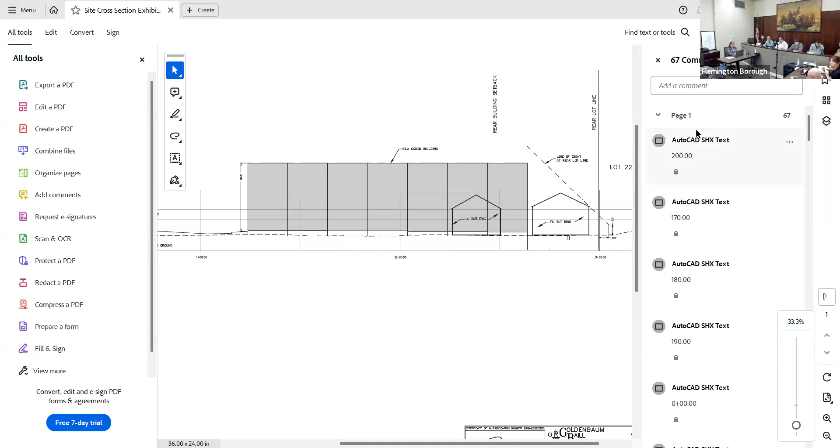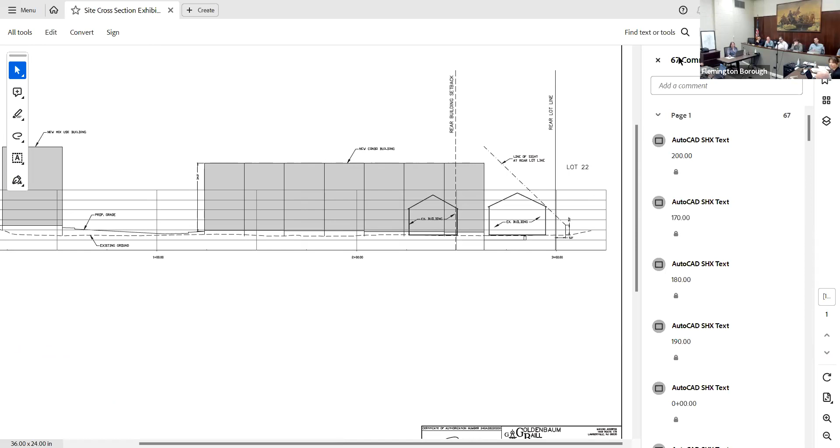That's okay, the way I have it set up on the big screen sharing, it's showing us for some reason. It's fine, it's a little small, you might want to zoom in, but I think you can roughly see it. If you close the two menus on the side, that'll help. Yeah, on the right side where it's the 67 comments, click that X. To the left. I can't get to it there. Oh my gosh. I need a 19-year-old to help me. That's as good as you're going to get it. I want to show the entirety of the dimension.

Okay, Mr. Rupnarain, why don't you identify this exhibit as a site cross section exhibit. I think we're up to A4. So this is a new exhibit - did you give us that, Tammy? The site cross section exhibit, exhibit A4. Can you please describe for the board what's depicted in this exhibit?

My office prepared this exhibit to show a cross section through the site, starting with Mine Street on the left-hand side of the screen and going toward the rear of the property through the two back buildings - the barn building, closest to the property line, and the garage, about 20 to 25 feet away toward the front of the property from the barn. The shaded gray area represents the two proposed buildings. The smaller shaded area toward the front or left-hand side of the screen is the mixed-use building we're proposing. This exhibit has been drawn to scale to show the actual height of the buildings relative to the existing and proposed grades on the property. The 7-unit condominium building is the longer, wider shaded gray area toward the right-hand side or middle of the screen.

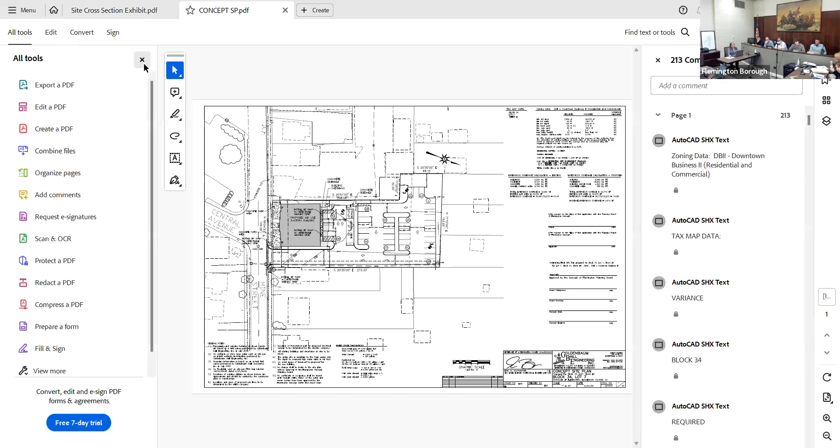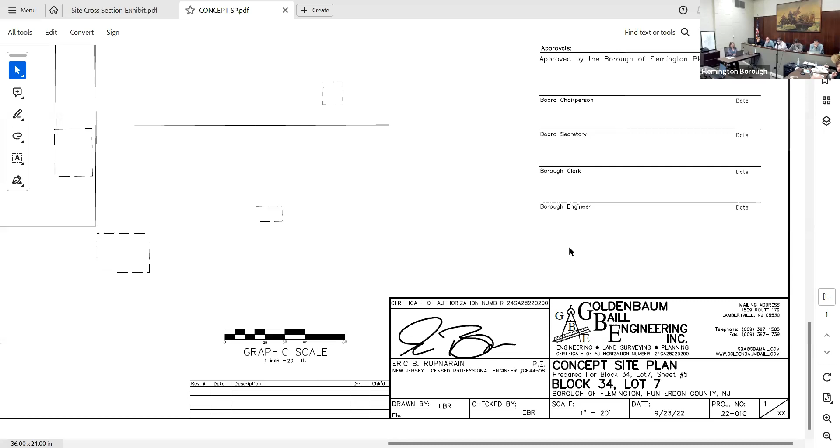That's it on the visual impact testimony. I'm going to have another exhibit here. You could identify this proposed plan as Exhibit A5. This plan is titled Concept Site Plan, prepared for Block 34, Lot 7, dated September 23rd, 2022. This concept plan reflects a proposed mixed-use 3-story building with the parking entirely in the rear, correct?

Correct. And is this a fully conforming concept plan to the Flemington Borough ordinance? Yes. And what type of mixed use does that provide for? So originally, when we started the project, the applicant was contemplating one large building towards the front of the property, in conformance with all of the building setback requirements for front, side, and rear.

And this building showed a mixed-use building with the ground floor entirely commercial space, and the upper 2 floors consisting of 8 two-bedroom apartments and 4 one-bedroom apartments, for a total of 12 residential units, plus the commercial space on the ground floor. The commercial space and residential units in totality require 38 parking spaces. This particular design and site layout provides 38 parking spaces. So this actually is a fully conforming plan that provides for 12 residential units. Correct.

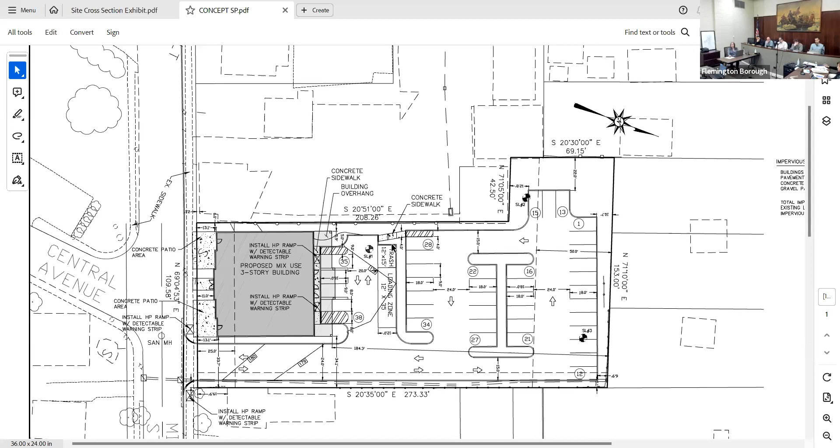But that's not what we're proposing, correct? Correct. The applicant is only proposing 11 residential units with their current proposal before the board. And in fact, if we apply the EV credits for parking, we might even be able to factor in additional units in this concept plan. Correct. With the EV credits, we'll create an additional 4 parking spaces on the property, which would allow the applicant to increase the residential units from 12 to 14. 12 to 14 or 12 to 16? 14. To 14. 2 more. Okay, sorry.

Anything else? That's it. Any other testimony? No, unless the board has any questions. I have no other questions. Okay, so questions from our board's professionals on the testimony around these 2 exhibits. Back to the visual. It's up already. Thanks.

The building at the rear that you're showing, that building is not going to be there anymore, right? Correct. That building's gonna be gone. Yes.

Explain again what you're trying to show with this exhibit. So the building's not going to be there. You're going to see the end of this building. You can see the end of the proposed building that's within the setback here. Yes. All right, maybe I missed, I didn't catch what the purpose of this was. What we were trying to show is if you're standing at the rear of the property and looking towards Mine Street, essentially what you would be looking at based on what exists right now. So for you to see anything beyond the building directly in front of you, you'd have to stand and pretty much look at an angle up into the sky.

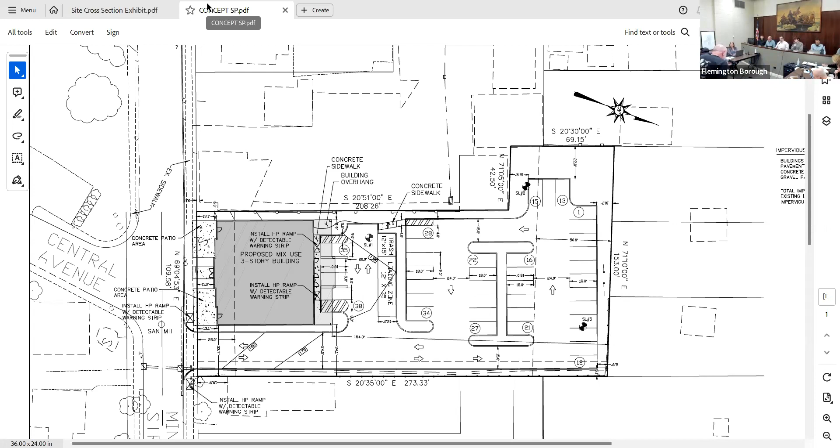Can we go back to the visual and zoom in on the part at the back and maybe move that over to the left? Because I think the key part of what you're trying to show is getting kind of lost on the screen. So I just wanted to see that a little bit before I actually ask the question. It was a little hard. So this is the.

Currently, from the back of our property, we see a blank face of a barn.

To echo what was said earlier, will there be a rendering to show what the actual building would look like from that perspective? Yes. Okay, other questions from members of the public?

Nancy Connolly, 22-1 Canal Street. Is there any renderings that can be produced that will show the height variance of what you're doing now versus what is there?

That will show what it will look like from Canal Street, from the backyards of Canal Street. We're going to have an architectural plan to show you what the building looks like from there, the height difference. I'm talking engineer. So that hasn't been taken into consideration - we don't have a section all the way through from Mine to Bonnell.

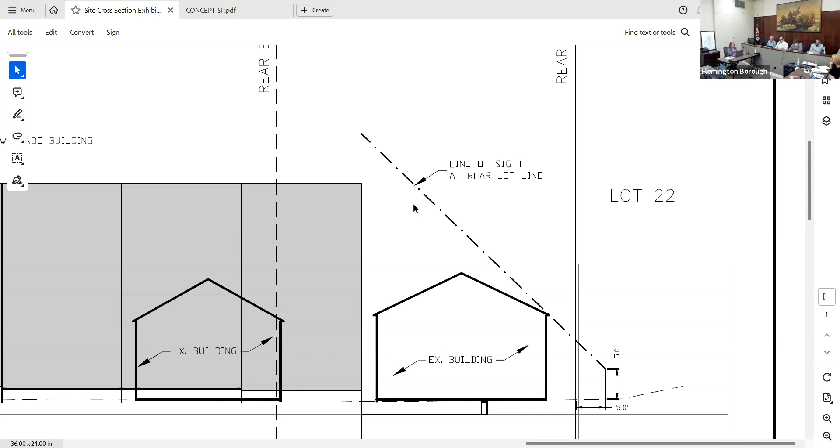All right, call Mr. Kyle. I honestly don't remember, did we swear everybody in? I was looking at that right now. Okay, I thought we did. He was here last time. Yeah.

I offer Mr. Kyle as an expert in the field of architecture. Any questions from our professionals or objections? I just can't help myself - I just want to make clear that Mr. Kyle is not related to my partner. Okay, that's fair, we want any appearances of conflicts put out there, that's fair. Any other questions from members of the board? Okay, without objection.

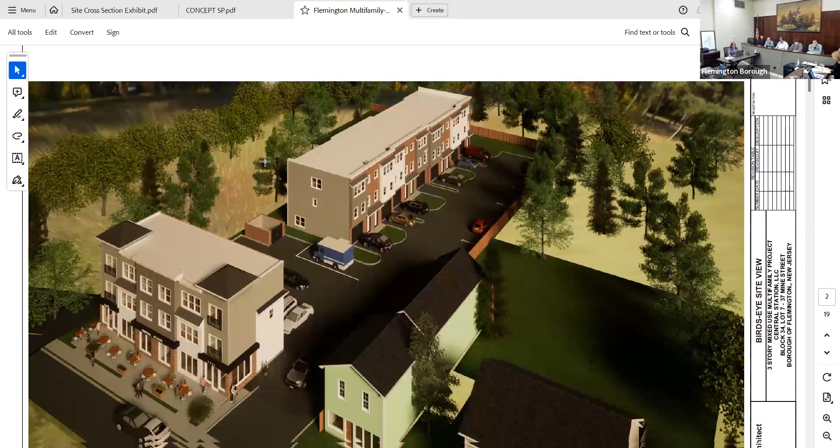Today's thing, okay. What day? So October 3rd, 2023.

Why don't you take the board through your presentation on the architecture? We want to resolve this. Okay, all right. What's the overall development description?

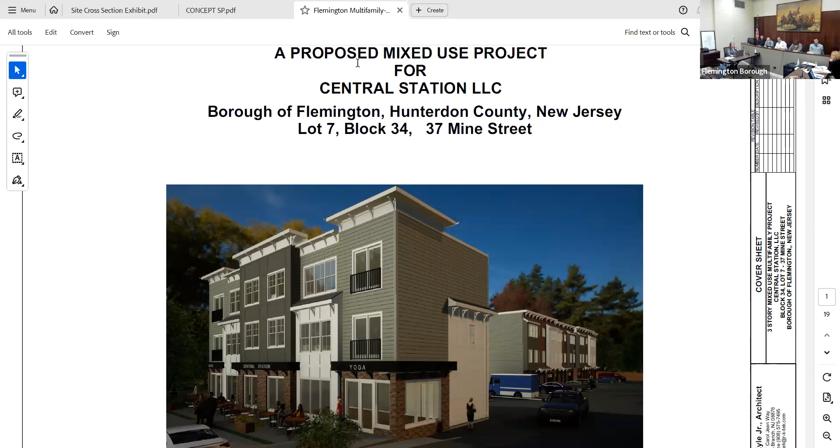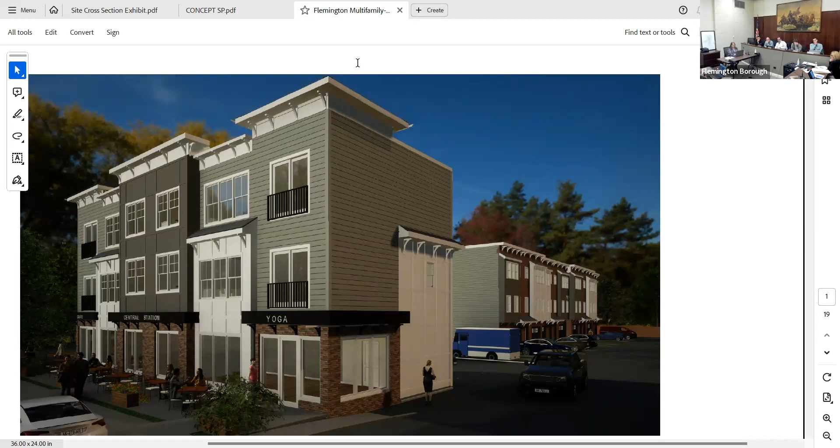With downtown shops, a brewery, and local restaurants and cafes in the area, Flemington has many elements that can make it a magnet community for a younger population, attractive residences, and additional commercial uses that meet the needs of that population and existing residents, critical to continuing the revitalization going on in the area. Our vision is to transform the vacant, underutilized, and deteriorated site into a mixed-use multifamily project that both complements and elevates its surroundings, and reinforces the connection between the downtown area and the Stangl revitalization area that's going on now.

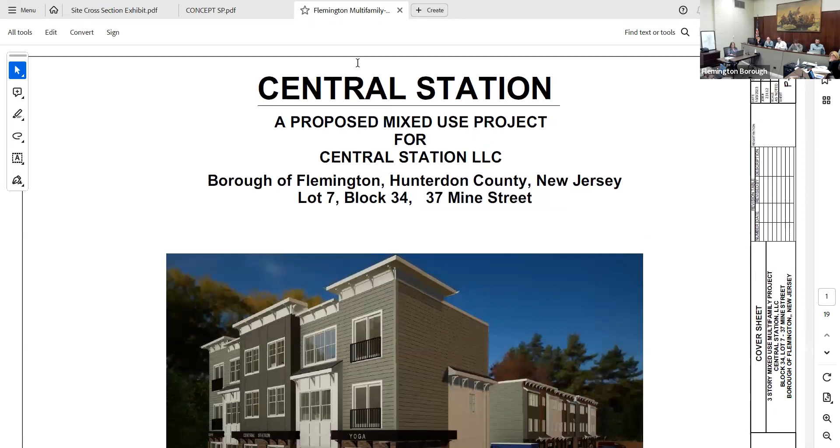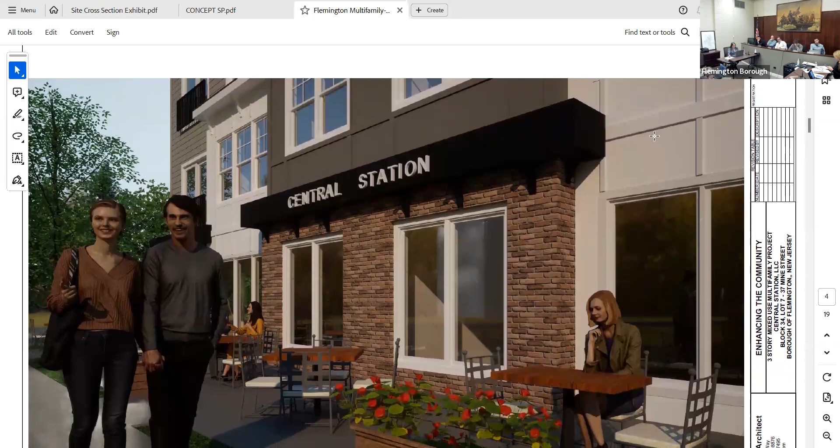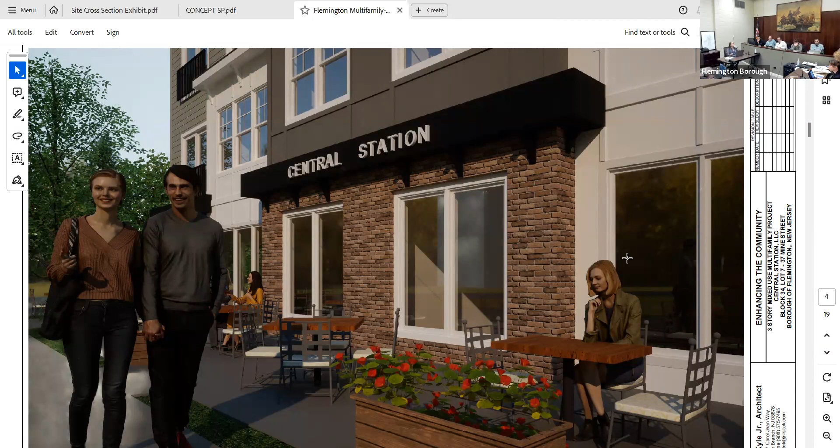It starts with a refreshed Main Street streetscape that combines welcome familiarity with a fresh outlook. The building facade blends today's design trends with familiar and traditional materials such as brick and smooth clapboard and board and batten siding. Traditional architectural elements such as trim cornices, double hung windows, and brackets are used to blend this with the surrounding historic architecture.

Next, I'd like to give a brief description of each building. The first one is the building along Mine Street - that's a mixed-use building. The building facing Mine Street is a three-story walk-up mixed-use building. The first floor is comprised of 2 commercial spaces, and the second and third floors each have 2 residential units per floor - one 1-bedroom unit and one 2-bedroom unit on each floor, for a total of 4 residential units in the building. All residential units have open floor plans.

The building footprint is 2,024 square feet on the first and second floor, and the third floor gross area is 2,000 square feet. The width of the building is 69 feet 11 inches, and the depth at its deepest point is 30 feet 2 inches, at the center point of the building going front to back. The maximum building height is approximately 39 feet 1 inch at the topmost roof peak, where there are hip roofs at the 2 corners. That is less than the 40-foot maximum height allowed by the zoning ordinance.

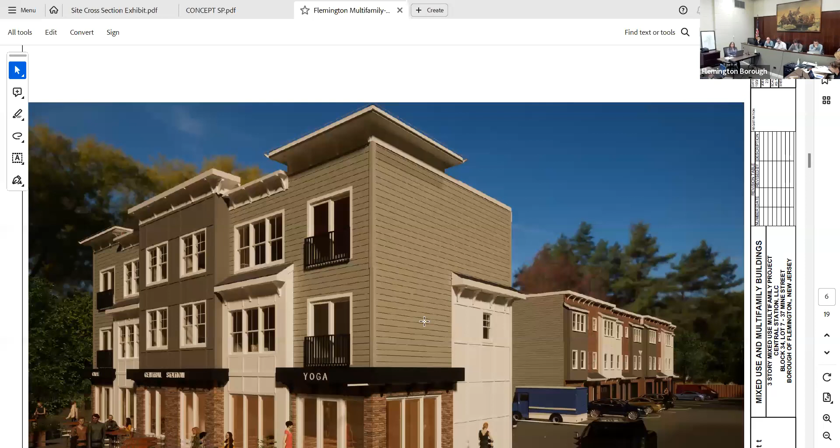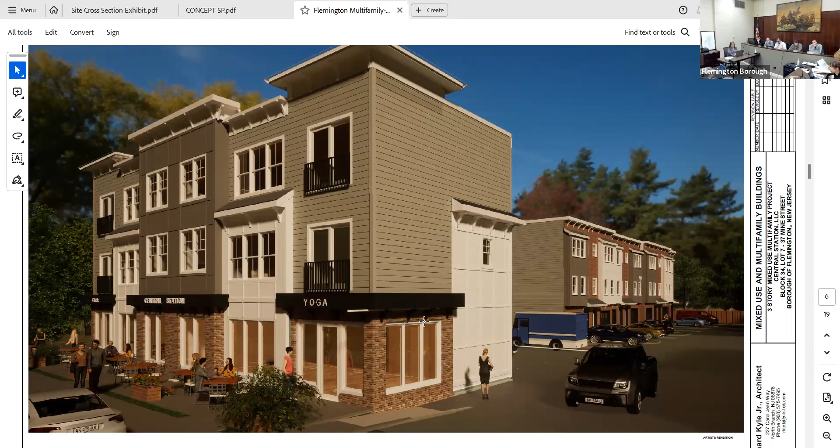Moving on to the multifamily building towards the rear of the property. The multifamily building behind the mixed use building incorporates 7 townhouse style units with 2 stories above the garage and entrance, so it's a 3-story building. The footprint of the building in total is 5,600 square feet.

The width of the building is 140 feet, going from front to back on the site plan, and the depth of the building is 38 feet 8 inches. The first floor is comprised of the unit entrance, a 1-car garage, a multi-purpose room, a laundry room, and a utility area.

The main floor level has the living level, which includes the living area, the dining area, the kitchen, powder room, and a closet. The upper floor has 3 bedrooms with closets, and there's 2 bathrooms. All residential units have open floor plans in this building as well on the main floor.

My proposal originally submitted to the town had an optional 2-bedroom design. That has been removed, so the optional 2-bedroom design included in the proposal has been removed. All units will be 3-bedroom units.

The maximum rear building height is approximately 34 foot 1 from the finished grade to the cornice top, which is less than the 40-foot maximum allowed by the zoning ordinance. The building wall height facing the rear property will be 36 feet from the current grade, similar to conversations with the engineer at the last meeting. There's a 2-foot, approximately 2-foot grade change at the back of the property, so accounting for the 34-foot 1, you would be at 36 feet from what would be the current grade.

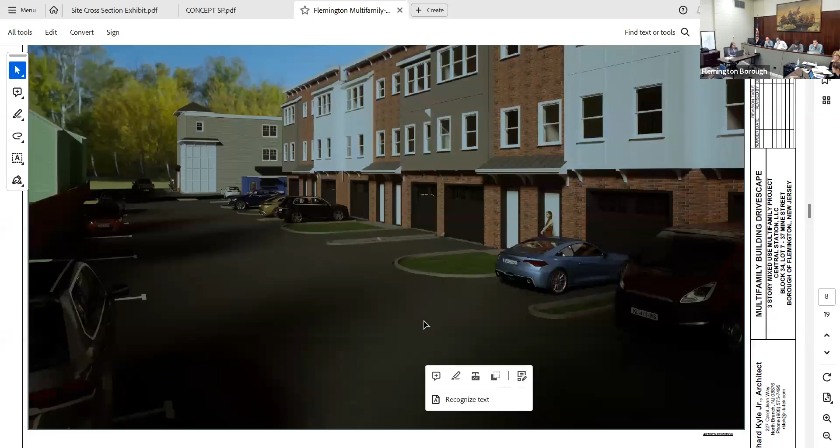Let's talk about the mixed use building in a little more detail. The front building's first floor is comprised of 2 commercial spaces along Main Street, and the entrance and stairwell for the upper floor residential uses is in the rear of the first floor. Commercial uses shown on the plans are examples only. All uses allowed under the zoning ordinance are potential uses for the commercial space. The commercial spaces and second floor residential units will be ADA accessible according to New Jersey's code.

Commercial space number 1 on the left side of the building has a 900 square foot gross floor area. Commercial space number 2 on the right side has a gross square footage of 732 square feet. Ceiling height of the ground floor will be 10 feet.

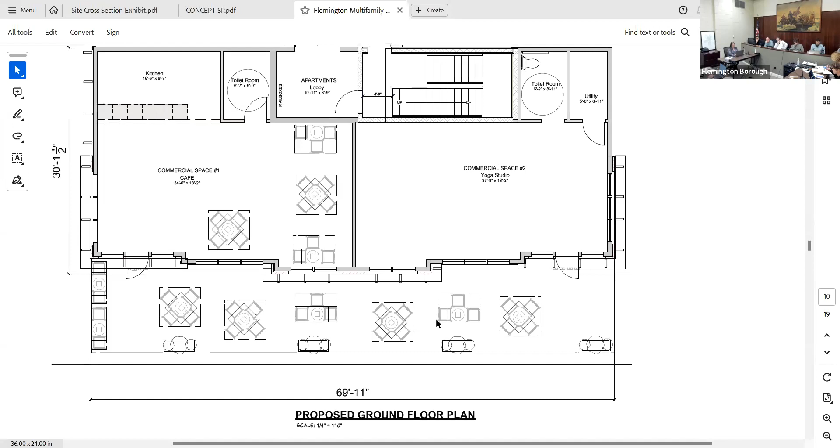The residential units, there's 2 per floor, and there's 2 floors. So you have one bedroom unit at 756 square feet and 1 2-bedroom unit at 950 square feet on the second floor with a ceiling height of 9 foot. On the third floor, you have one bedroom unit at 769 square feet and 1 2-bedroom unit at 940 square feet.

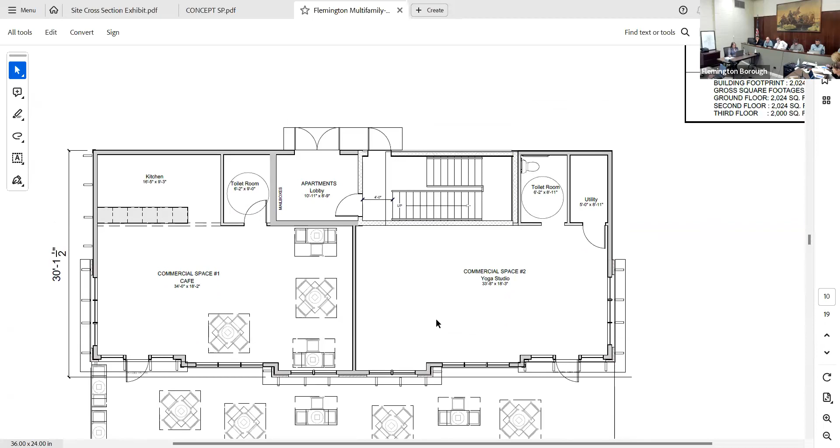On the third floor with a ceiling height of 9 foot. The slight changes in square footage have to do with the way some of the bump outs work in the front of the building.

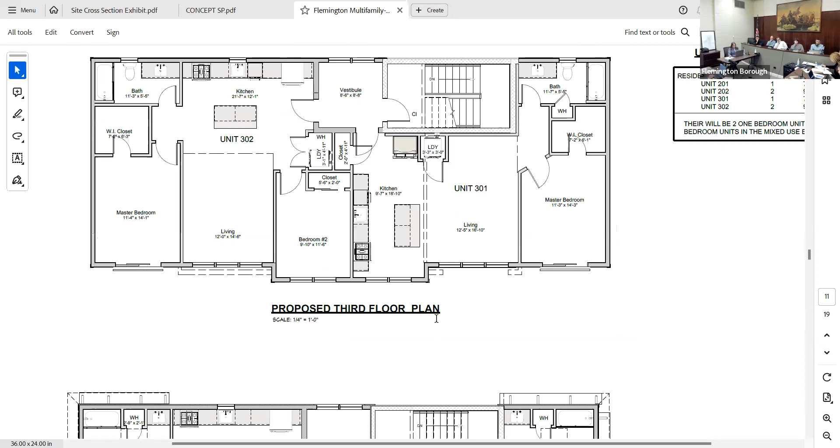1-bedroom units will each have a main open plan, the dining and kitchen space all open. It'll have 1 bedroom with a walk-in closet and 1 bathroom. There will also be a coat closet as well as in-unit laundry space.

The 2-bedroom units will have an open floor plan as well with the living, dining, and kitchen. 2 bedrooms, with 1 having a walk-in closet, 1 with a standard closet, and 1 bathroom. There will also be a coat closet as well as the in-unit laundry space. There will also be space for the HVAC units.

All residential units will have luxury vinyl tile floors. The primary bedrooms will have a sliding glass door facing Main Street with black aluminum guardrails on the outside. An external mailbox package box for the commercial units and the 4 residential units will be placed on the 6-foot wide rear sidewalk to the right of the rear lobby door.

So maybe we can go back to the first floor. Next one, please.

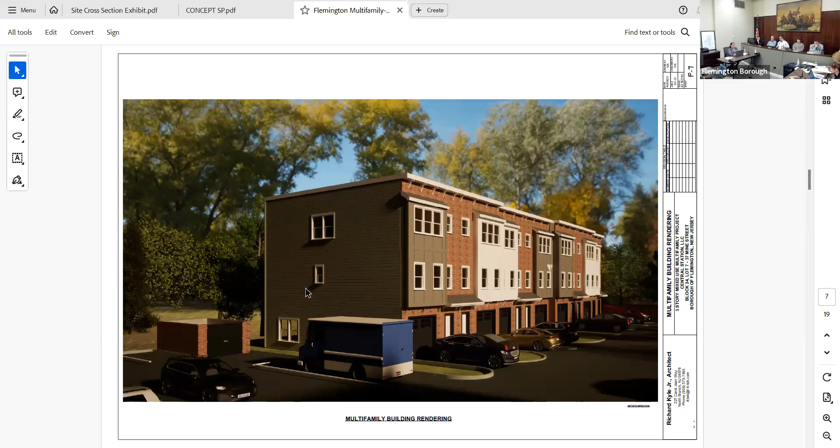As far as the materials to be used on the project, we've used a mixture of materials. We have clapboard and corner boards — we're looking to use fiber cement, smooth clapboard siding with a 6-inch exposure. In the drawings submitted, they're painted a HardiePlank pearl gray color. Also, on the front of the building, there's board and batten siding, something like an Azek or similar, and that would be white. In some instances, it could also be an age-treated color by HardiePlank, depending on the rendering.

The brick would be a running bond. The color hasn't been determined yet, but it would be something similar to what's in the rendering. There would be detail, not necessarily shown on these drawings, around the window and door openings to add a little more interest, and we'd look to maybe some of the historic stuff.

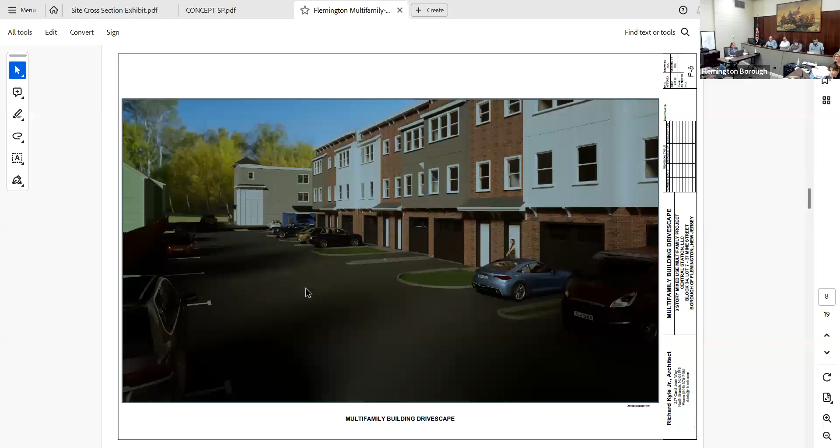Talking about mailboxes, I'm going to show this here. This is also going to have an external mailbox and package box for the 7 residential units, and that'll be placed at the edge of the grassy area adjacent to the loading zone. If you're looking at this picture, it would be to the right of that box truck, between that and that car. So that's where the mailboxes will be located in that area, and it'll be facing the drive area.

Exterior, the HVAC again will be on the center part of the roof, so it's not visible from the public. And if required, for some reason, screening would be installed if it's necessary.

On the rear part of each of the units, there will be a concrete patio that is 10 foot wide and 6 foot deep going towards the side property line. That'll be shown in an updated plan, it's not shown in the drawings you have. That'll be outside each of the rear sliding doors, which is shown on the plan. There will be a 6 foot high and 6 foot long screening fence placed between the adjacent patios for privacy.

A table and 4 chairs and a barbecue grill are what are anticipated on the patio. The lower level will be reconfigured in an updated plan to allow the main floor and the lower floor patio doors to align over each other, where they currently do not.

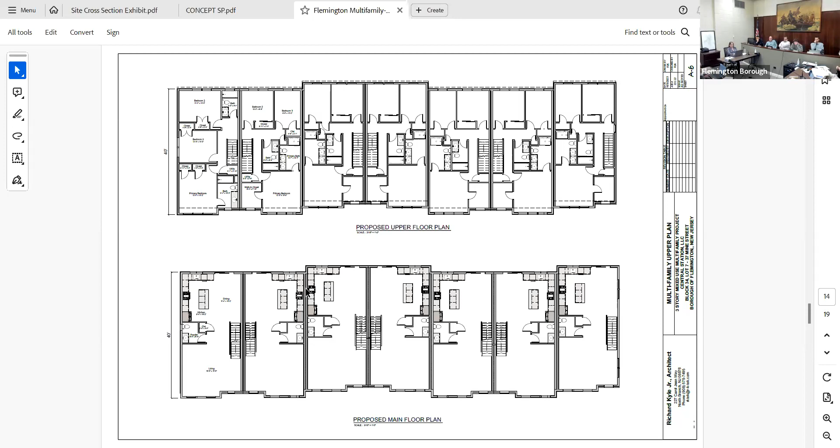Exterior lighting here, there would be a sconce light located at the front door, at the rear doors, and a recessed light in the little roof area that is over the garage door.

Materials used here are the same materials and colors that we have on the front building, to keep continuity between the entire site. I can go through them if you want, but basically it's the same materials and colors. There's no signage that would be here other than house numbers, so I don't see that as being anything there.

One of the questions that came up had to do with the historic nature of where we are. We are in a historic district, so we have something for that. The site is located within the Flemington Historic District, and according to the memorandum on August 24th, 2023, the buildings on the site are classified as either encroaching or non-contributing to the character of the Flemington Historic District.

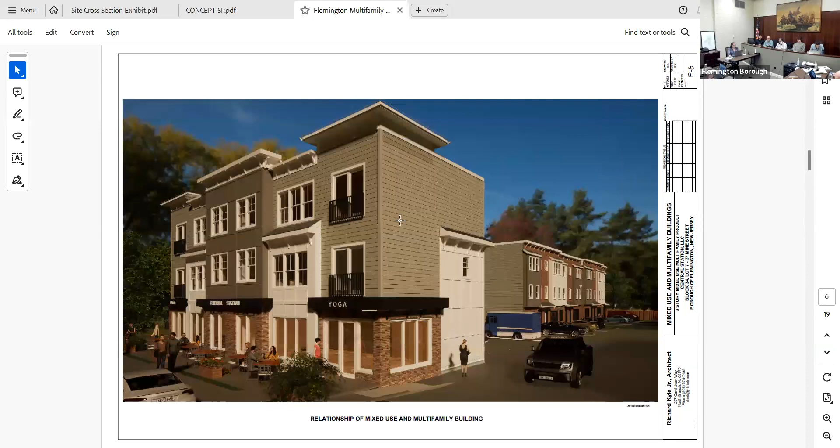Okay, great, look at this. Basically, we would be putting them in the center of the roof, so it's farthest away from any point. Those would be condensing units in the front building, slated to be a heat pump system. So there would be 6 units that would be there, and they're not huge.

And they needed to be screened. I testified that we would add screening around it, but I'm not sure with the height of the building that you'd have to be pretty far away to see that. It's the same thing with the back building as well. Those would be more traditional HVAC units, and those units would go on the roof as well, and again, if needed.

They would be. And how do you get roof access? In the front building, there would be a ladder system in the stairwell that would go up to the roof. For the back building, I would think that would be accessed through a ladder outside of the building.

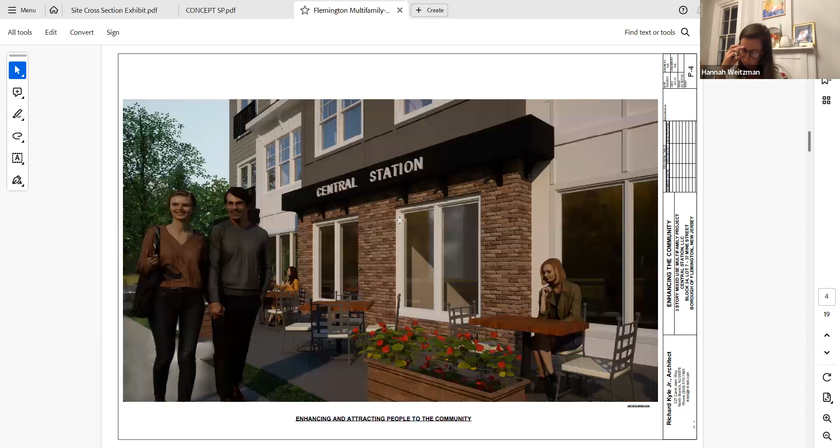Okay, thank you. And then I had one other question, just for the front building, since the windows are all visible on the main street and everything, is there any kind of proposed, or would you be willing to provide consistent window shades for the windows there, just curtains for the apartments or the condos?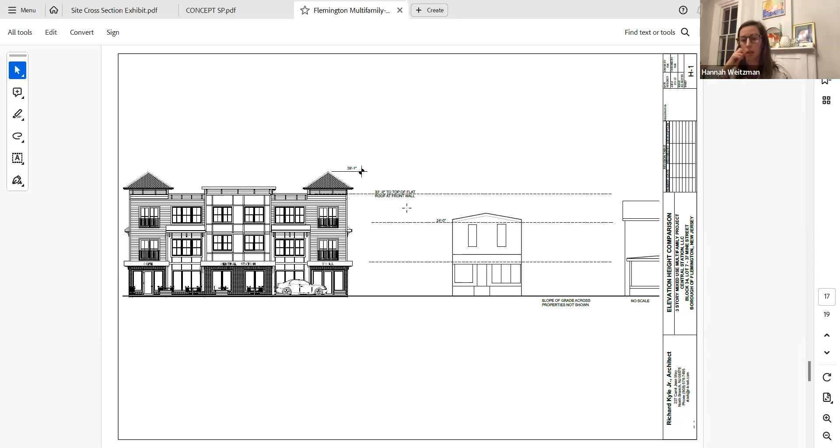I don't know that we were getting to that level of detail. I wasn't sure if that was something you considered or not. That might be a little bit difficult for us to control, quite honestly, because condo owners could put up their own curtains or shades in their windows.

Okay, I think that's it from me. Thank you.

I just want to clarify for my notes. I think Dennis had asked a question about whether there was going to be parking in the front, and I'm not sure if we got an answer. The architect didn't provide testimony on that, but I can answer it: there are 2 on-street parking spaces existing along the frontage of this property, so there can be parked cars in front of the building. That's the existing condition.

Thanks, could you stop sharing again, just so I can see who's speaking? Makes it a little bit easier. Jim, do you have any questions?

The only question I had, I didn't hear any discussion about the height of the buildings to the left of the structure as proposed. If I remember correctly, they're all pretty much at most 2-story, but mostly single-story, even the commercial ones. This is going to be the last big building on the block, apparently, and it will be the tallest compared to what is at Main Street and coming back. But what's the next building to the left, one story or two? I think they're one-story. There might be some two-story toward the back, but I think it's a one-story building.

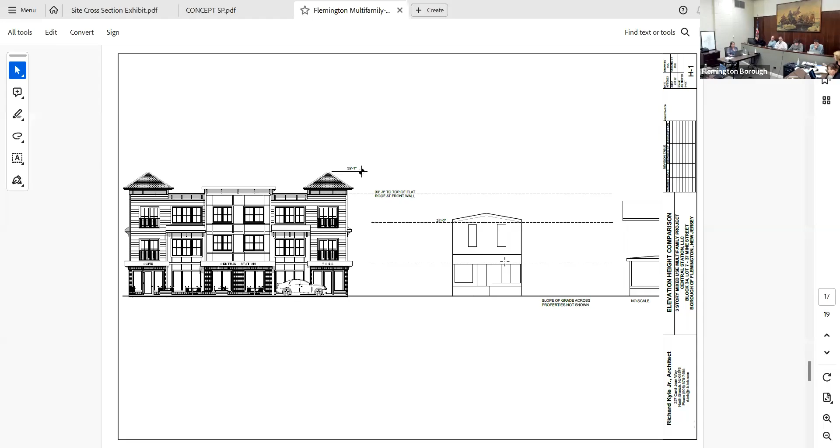Go to the one, if you just look at the overtop view. So the front of the building, the grade goes 0.9 feet up, right? Well, we're talking about the back building for that house, not the front building.

So the high point is towards the center of the site, and then in the back of the building it steps down. Directly along, you get something of a step in each place. There's no basement in any of it, so the slab is going to be on whatever the existing grade is. In the case of the unit closer to the center, that unit might have a ceiling height of 9 feet, and it would get progressively taller toward the back, where it would be 10 feet.

So the floor of the middle of the ground floor is going to match what's going on on either side of the building. We have to see the final engineering changes they were discussing, and work it out so that the goal would be to make the grade the same on both sides, if possible. If it couldn't happen, we would add a step to the back, coming out of the back door to the rear patio. The front door, though, would have no steps - that would be straight.

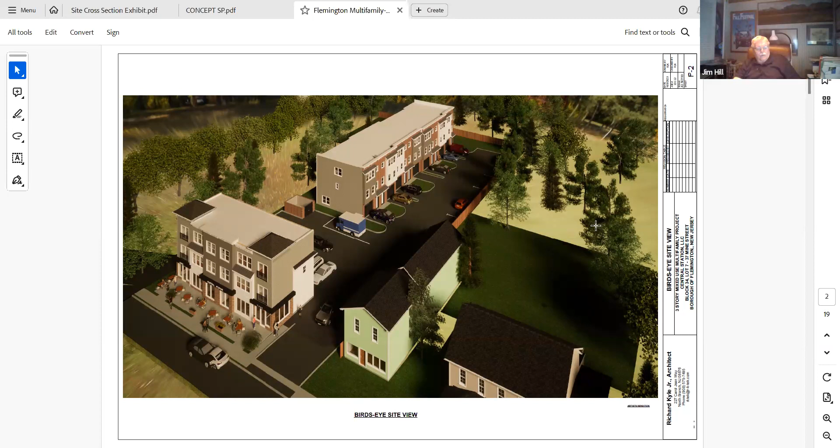One more question - the roofing, was it supposed to be TPO? TPO, which is a membrane roof. What would the life expectancy be on a roof like that? Approximately, I think it's 20 years, though it depends on what grade you pick. Thank you.

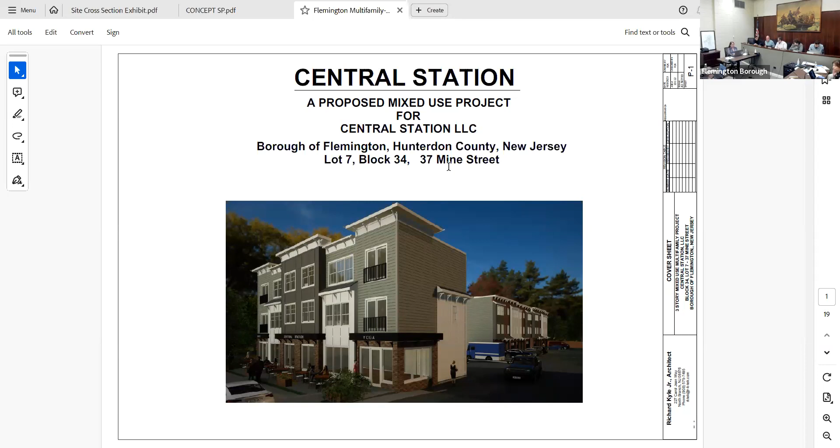So although you are not seeking a height variance and your project is completely compliant within the borough guidelines, you did testify that the two peaks on either side of the front building were purely decorative - your words, not mine - adding approximately 6 feet of height to either side, to the front corners, yes. So theoretically, you could alter those two corners without changing the mansard roof or making the living room smaller, really without changing the project substantially.

You could, as an architect—I don't know what you do—but you could design something different that could lower the massing on either one of those two corners without changing the overall design of the interior.

Yes. And on the back building, can you... I don't have a scale on the computer. The last townhouse on the rear building would be precluding you from reaching our setback ordinance. I know there was some back and forth, you said it's about roughly a foot. Can you strike a measurement for me on how wide that last condo is? In other words, across the rear property line.

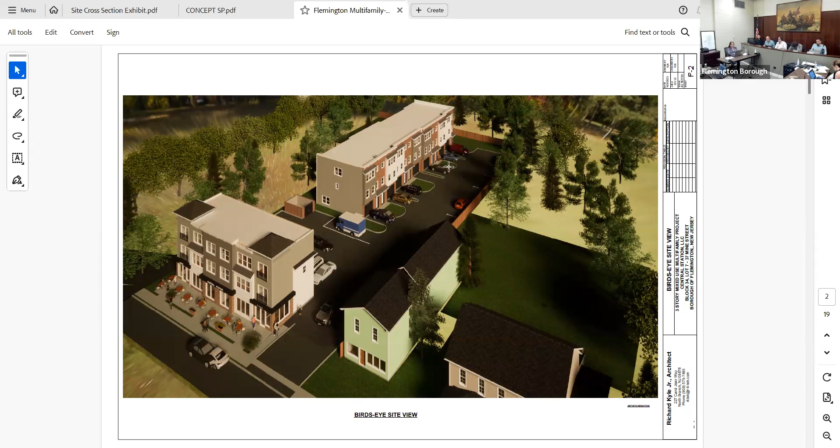In other words, the applicant is asking for a variance for a setback. You are about 27 feet shy of that. I am curious to see what that last unit is from a measurement. I think you can scale it.

Yeah, you could scale it from here. It's 20 feet—I know that because it's a 140-foot building and it's 7 units, so it's a 20-foot wide building, and its depth is 38 feet 8 inches.

Okay, so at 20 feet wide, even if that last townhouse was gone, was removed, you would still require a variance in setback. You're not set back. Right, yeah, it's... okay, I know it's questioned that. And, thank you.

I'm good, I'm good. Questions? Yeah, I have one question.

The lighting on the front, where the garage is and everything, the front door of the townhouses—so the units in the back have switched, individually switched for each owner. In the front of the building, I would think you'd have one, probably a recessed light over the front door, recessed into the wall, and then over the garage doors there would probably be two recessed lights.

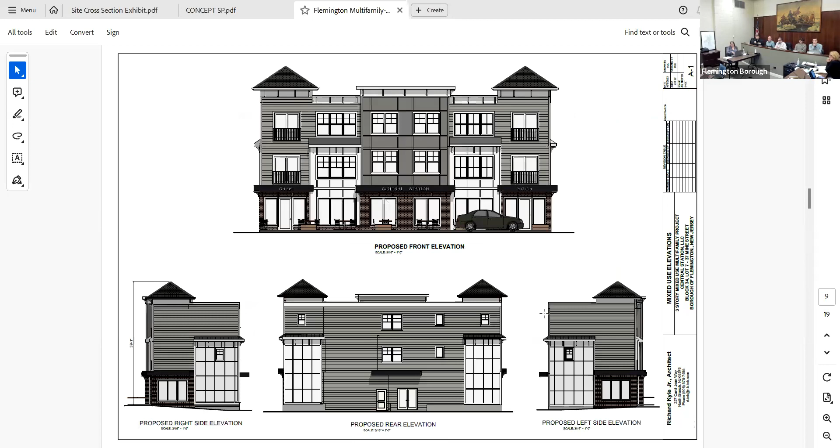Can we go to the pictures of the roof lines, please? Did you consider, now where we have the buildings in Flemington... did you consider something of this nature where we would have a continuous roof line? And if not, would you consider something that would show a continuous roof line, either of this, or this is a very shallow pitch roof?

Would you consider more traditional roof lines than the one you show in the picture, with those things sticking up on each end? We're hearing the issues that have been raised, and we're going to come back with revised architecture.

So will the whole plan, not the layout, but the appearance of the buildings, be substantially different?

Are you suggesting? I'm suggesting that we're hearing the comments, Mr. Kyle is hearing the comments, and we're going to do a little more research and come back with something that hopefully will meet concerns raised. I'm not saying it's going to make everybody happy, because it's very subjective - what you might like might be something a board member might not like, and might not be something my client likes. But we're listening to what's being said, and we're going to try to come up with revised architecturals that can make most people happy, or at least a little more happy.

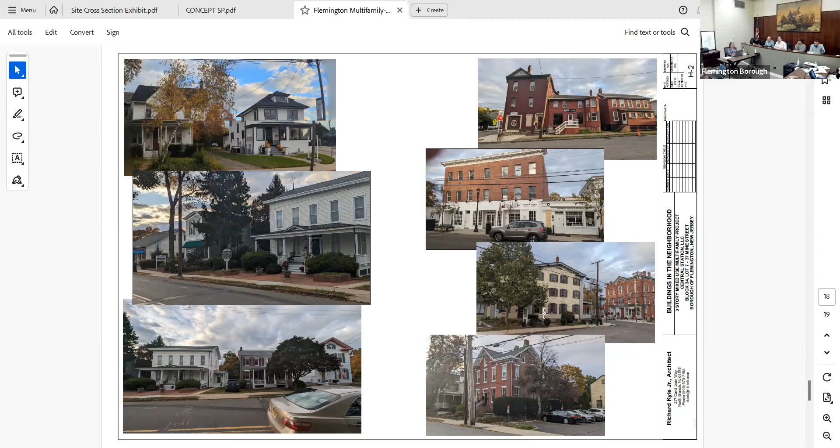Now, I wanted to ask again about the 7th unit on the back building. If the 7th unit was eliminated, how many feet would you be from the rear property line?

And the requirement is 50? So you would only be 7 feet out of line instead of 27, is that correct? That's correct. And it's better - giving - than the 23 feet it is now, but you're still not obeying our ordinance.

So would you consider making that concession to this town so we could have more greenery? That's something I have to talk to the owner about. Well, will you explain to the owner, please, that people are desirous of more greenery?

And that brings me to the front of the commercial building. Is that first floor going to be 2 units or 3? Because on one plan it shows 2, but when you look at the front of the building, does it not encourage you to think there are 3 units there? There's 2 doors on 2 end corners.

Two commercial units. There's 2 units in the building, yeah, even though it looks like 3 from the exterior. Okay, and then shutters.

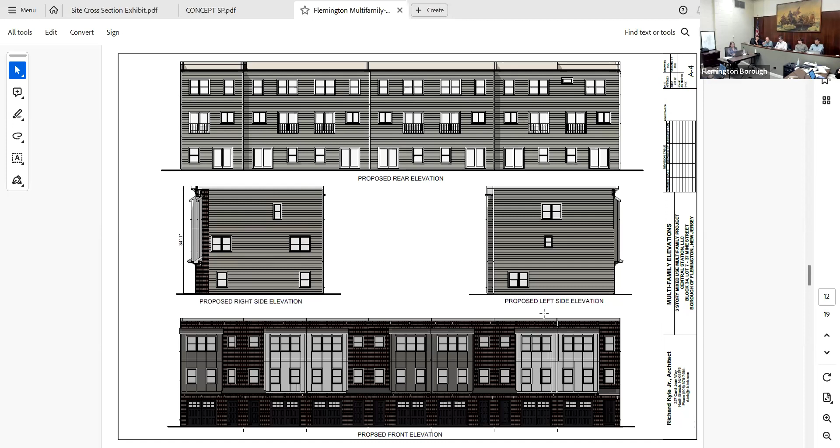Okay, great. And then for the perimeter fencing around the property, what are the thoughts on the material to be used, given that it's in the historic district? We had already presented an exhibit with respect to that fencing at the last meeting that was proposed. Pull that up if you need to - but that was with a different witness, so I don't think he has it in front of him. I don't recall what the testimony was about the fencing.

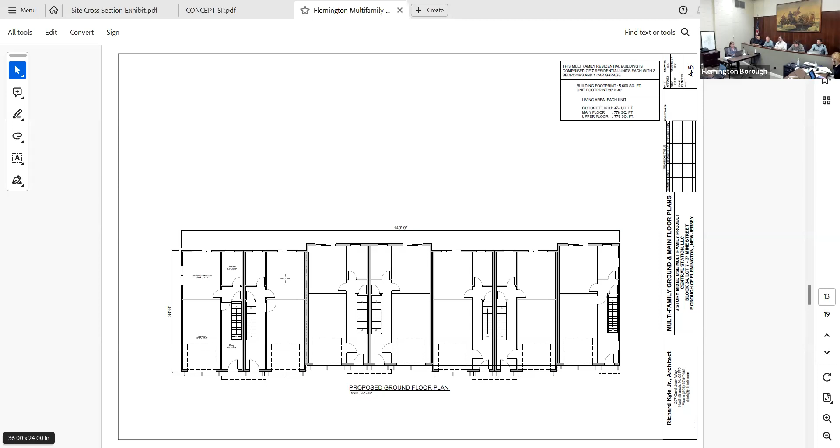Well, I kind of remember the idea was that it could be like a stone plastic fencing with a stone pattern. When I looked at the stone of that type of fencing by the brewery, I don't know if I, as a homeowner of Benell Street, wanted to put in that fencing, that the Historic Preservation Commission, I don't know what they would say.

But looking at the guidelines, they certainly stress the use of wood as a primary fencing material. Now, the submission of that exhibit at our last meeting happened after the HPC had a review. So I think that if we're talking about revisions, HPC is going to have to take a look at everything anyway, so I would imagine we could ask them to weigh in on the fence as well.

Okay, great, thanks. Other members of the public with questions? Okay, seeing none,

It's 9:50. Do you want to call your planner or do you want to defer that until we find a chance to do the other stuff? I think it makes sense to come back with some additional plan revisions and tidy that up and present that testimony before we present our plan.

I would say, if at all possible, I would like, if we're talking about changes to the design, because some of the comments here have been around the HPC review letter, if we could have the HPC take a look at it, that would be helpful for the board, because we're talking about changes. So, Dennis, when's the next HPC meeting?